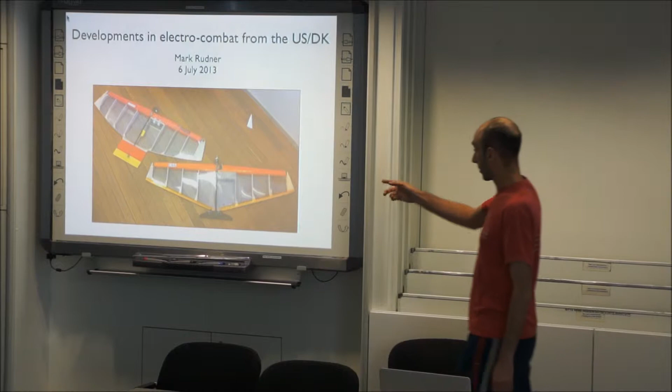So here are just some pictures of two models I've prepared so far. This was the first one. The second one, and it's not so obvious in the picture, is quite a bit bigger actually.

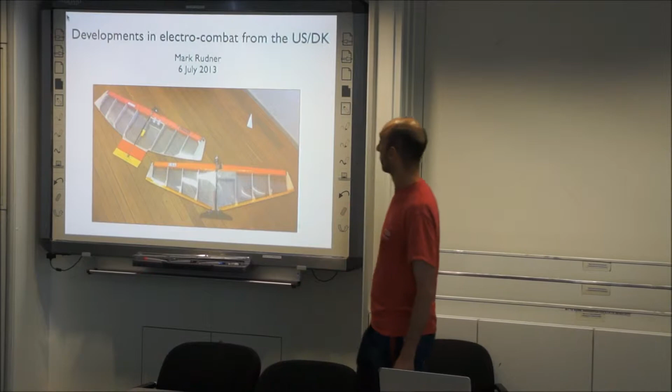I thought that more wing area would help hold the weight better, but it turned out the plane was just not a good plane. So here this weekend I only have this one, but there are some new ideas I used here, and I'll explain them in a bit.

So before I get really started, I think, well, okay, so we're here this weekend to have fun and talk, and also to share information. And I think also a big point of the weekend is to have a discussion about where we think electro-combat is going, what can electro technology do for us.

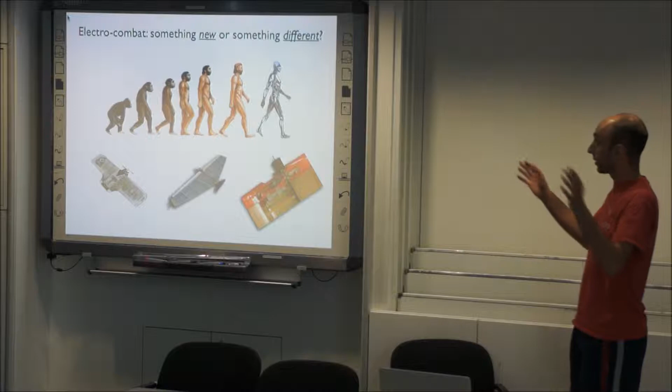And I think there'll be many questions which come up, but one overarching theme is sort of how do we think about electro technology? Is it something new or something different? And what I mean is, if we think of it as something different, we would say there's F2D.

It's been around a long time. We know how it works. And now, okay, there's electro. It has all kinds of different conditions we have to think about. There's batteries, electronics. So we just start a whole separate class and think about it independently from everything going on in F2D. The opposite extreme would be we think of it as something new.

So there's been some evolution in combat. If we go back to the 60s and 70s, there was diesel combat, and then in the 80s, glow took over, and technology really stabilized. Planes haven't changed, engines haven't changed in 20 years.

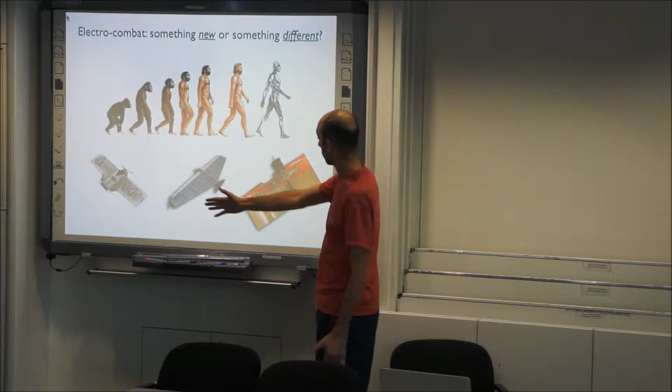Okay, small incremental improvements. And maybe the next step is electro technology. We don't know if it's going to be better, but maybe it is, and it's just part of some natural evolution. And this is something we should think about.

Which kind of picture do we have in mind? Maybe some of both, but I think it's a theme we should keep in mind.

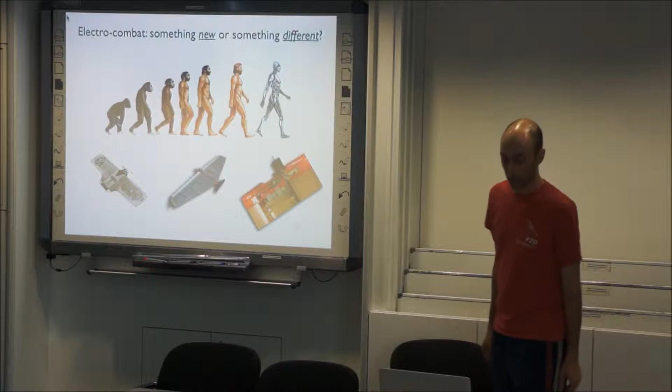So for the presentation, there's kind of two sections. The first one, I'll just summarize sort of what I found, and the second part, I'll show in detail some of the ways I found of adapting electro components into F2D models. Maybe just give some ideas. I hope I can see what you guys have done as well this weekend.

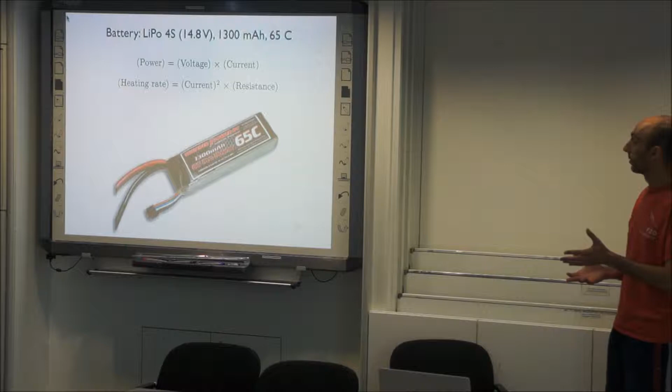So the starting point of all of this, my thinking when I started working on electro was I visited Lothar here in Munich about 1.5 years ago, and actually I was impressed. I thought electro would be a lot worse than what I saw. But the one thing that stuck out to me was that the level of current being used was so high. It was something like almost 80 amps.

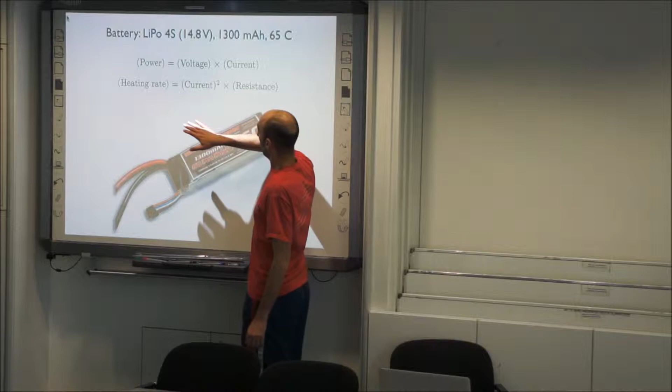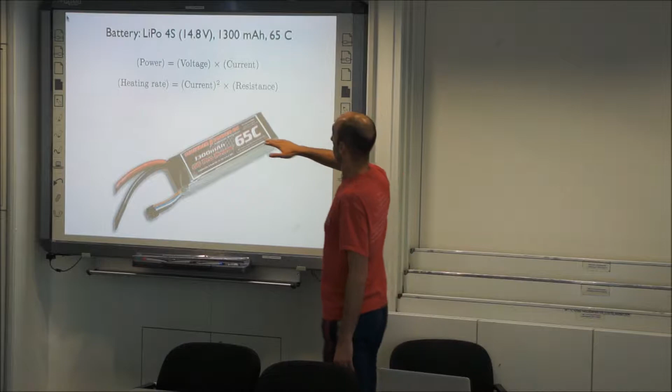And if you just look, okay, this is the only formula in the talk, but the heating rate that you get when you apply some current goes like the current squared. So as the current goes up, the heat goes up really fast. And the power that we're getting out of it is a product of voltage times current. So for a particular power, we can reduce the current by increasing the voltage.

So I said, instead of using a lower voltage battery, why don't we move to higher voltage? So that's why I started with this 4-cell battery, which is 14.8 volts, and that was the whole starting point for my thinking, and then I thought, okay, let's go from there. And so this is the battery that I've been using.

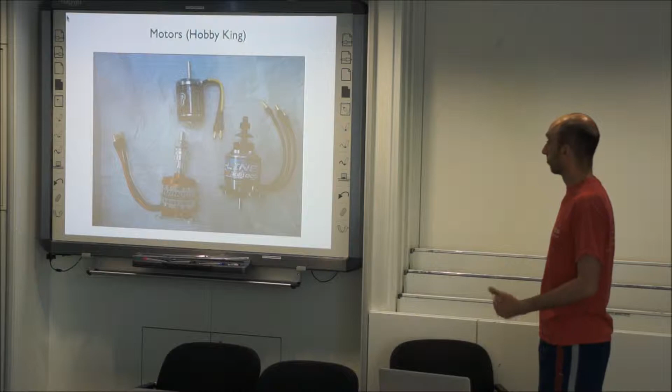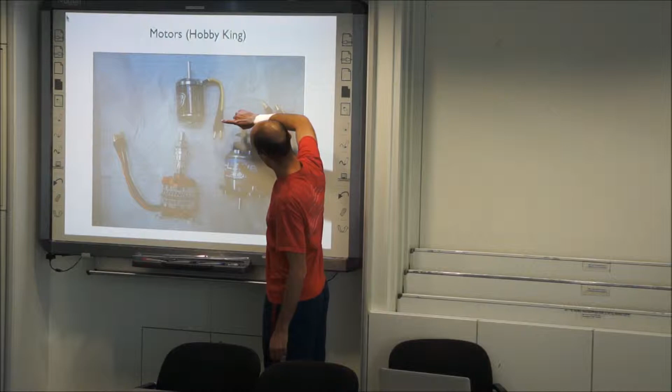For motors, there's plenty of motors you can buy online very cheaply. These were the first three that I bought, in January last year. They're all about $15 and come to your door in a couple of weeks. They have different characteristics, so you can't really tell just by looking. This is the kV rating, which tells you how many RPM per volt you get.

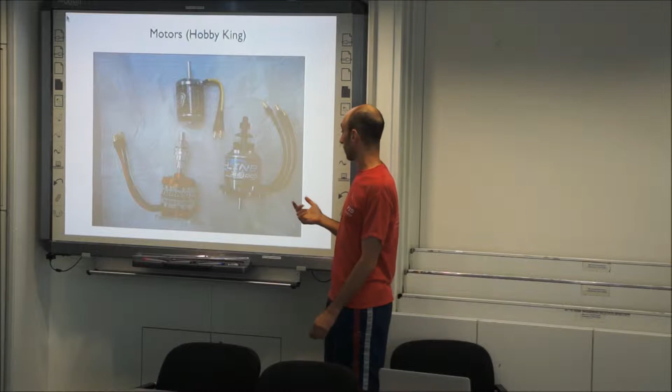This one is a very light motor, only about 80 grams, but it turns 2200 RPM per volt. At 14.8 volts, it's turning very fast. This one is 1000 RPM per volt, so it's much slower—more like 14,000 RPM in the air.

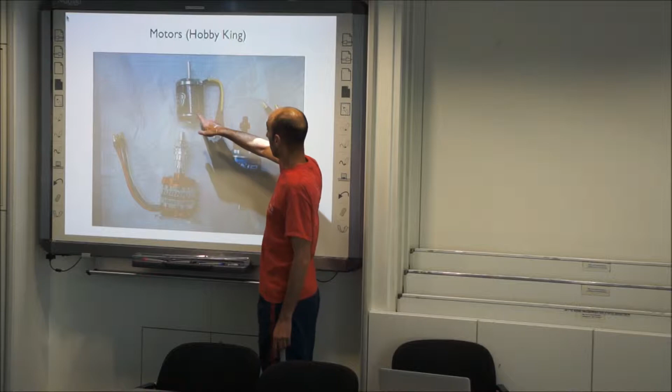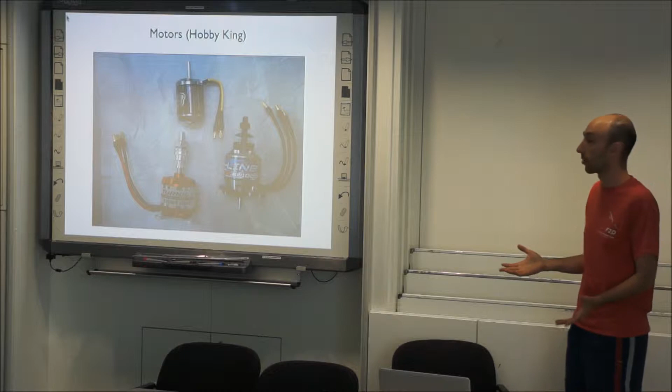And this was some kind of intermediate regime. Since then, I bought a cousin of this one, same weight, but it turns even faster. I tested it a few weeks ago and it turned 35,000 RPM with the T2 prop from Zorro. It was very noisy, but interesting—not from the point of view of reducing noise, but just as a high-performance motor. It could be something interesting to play with, maybe get something better than what a Fora is doing.

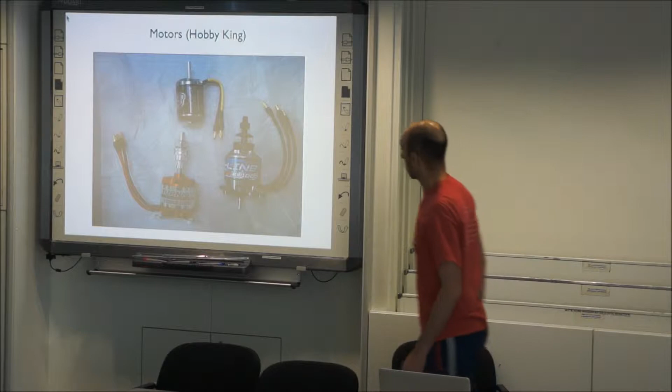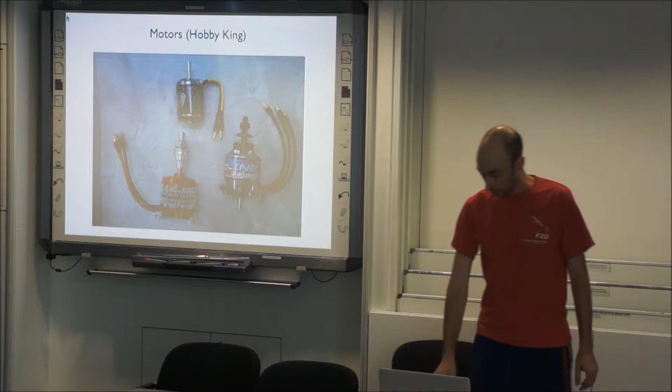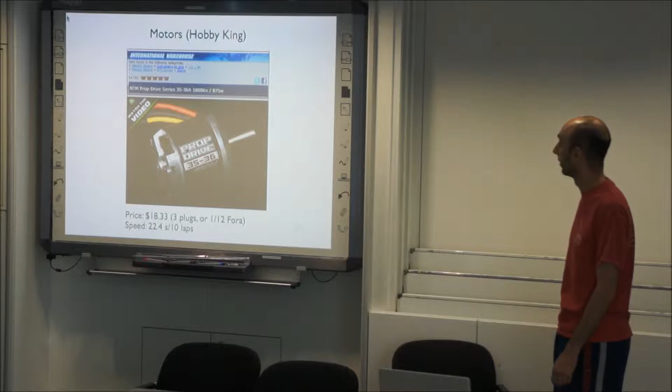So out of this motor and this one, I managed to get 24.7 seconds for 10 laps, but I couldn't do any better than that. Then I decided I need more power, and I found this motor, which is the best I've tested so far. It was $18 from Hobby King, and it got 22.4 seconds for 10 laps, straight out of the box. That was pretty exciting for me. So that's about motors.

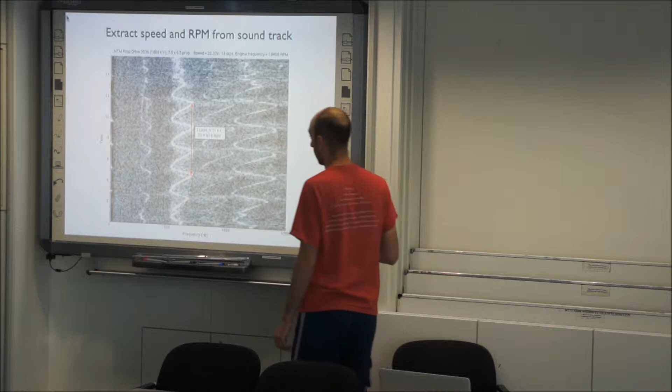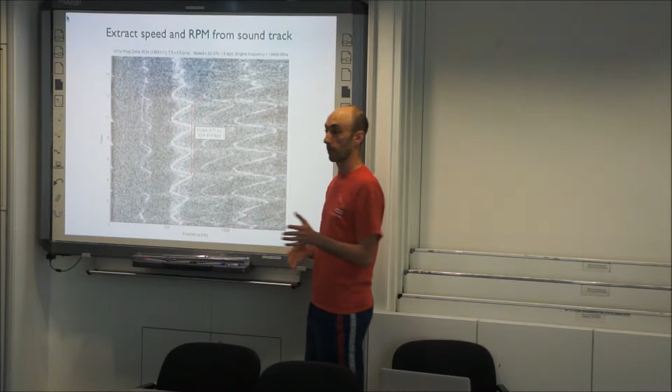As a kind of side note, there's some analysis I've found which is kind of neat. If you record the sound of a flight, just fly some laps, I wrote a little program where you put in this file and it outputs this picture. Time is running this way, and this is frequency, measuring the frequency of the engine sound as a function of time. The frequency goes up and down, just like the Doppler shift you're familiar with hearing.

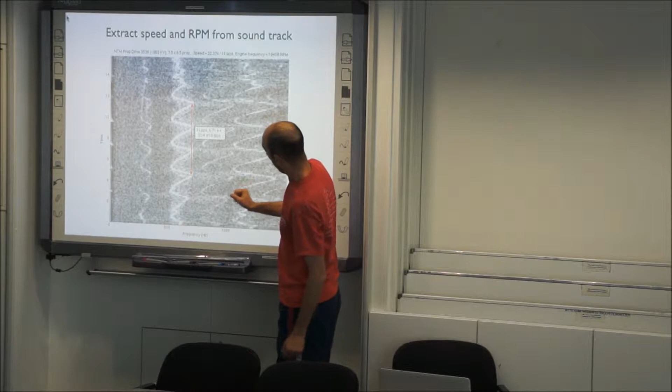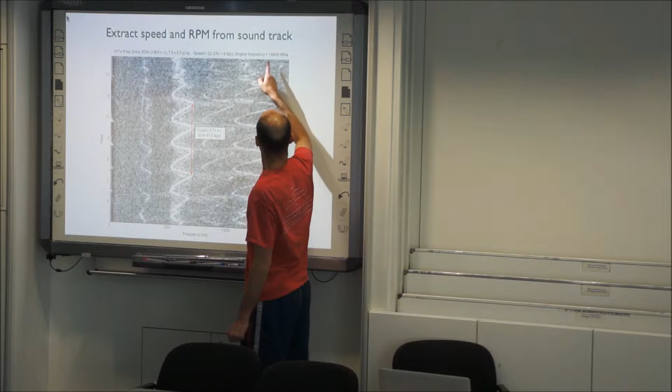Each time the frequency goes up and down, that's one lap. So you can just read right here what the time per lap is. And from the frequency itself, you can get the RPM it's turning in the air. So this one says 22.37, let's say 22.4 for 10 laps at 18,500 RPM. It's kind of convenient—just record your flight, and afterwards you find out all this information.

For props, I took a bit of a different route than maybe what other people have been doing. I've been using wood propellers, for a few reasons. One, wood is very light, and we have a weight problem with this stuff. I compared an APC electric prop to one of my props, and there's a 10-gram difference. That's actually a pretty big deal.

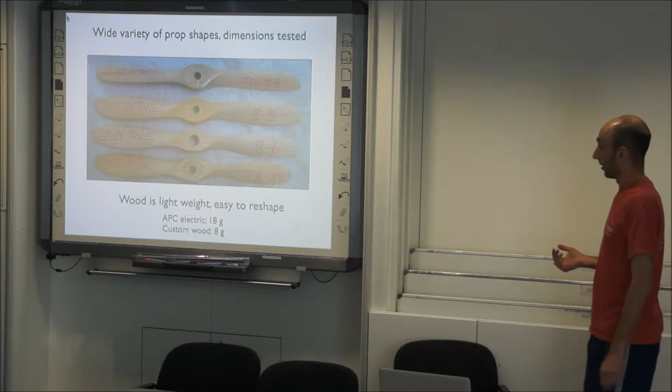The second reason is that when we used to fly fast combat 20 years ago, I had a lot of experience making these props, and these were actually left over from that time. It turned out that this one, which was used in competition in fast combat, is the best propeller I've tested so far on all the electric motors I've tried. I've made something slightly better than it since then, but somehow they work pretty well.

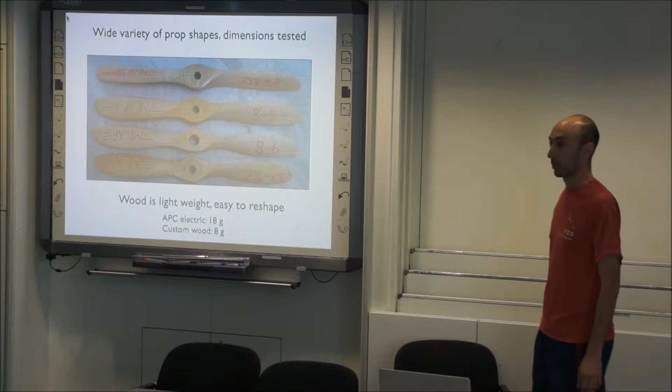I think eventually we need some kind of solution here. It's very time-consuming to make these propellers, but I think once we find the right shape, someone can produce them.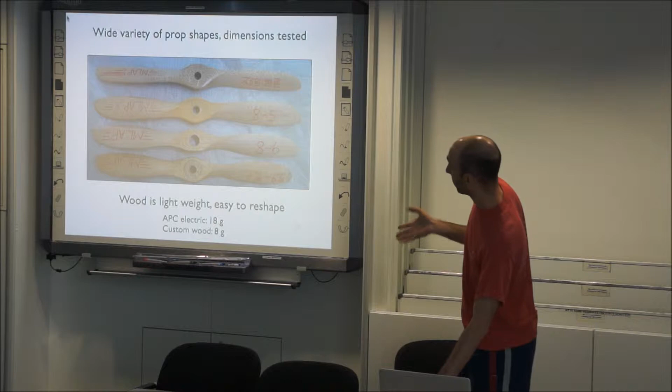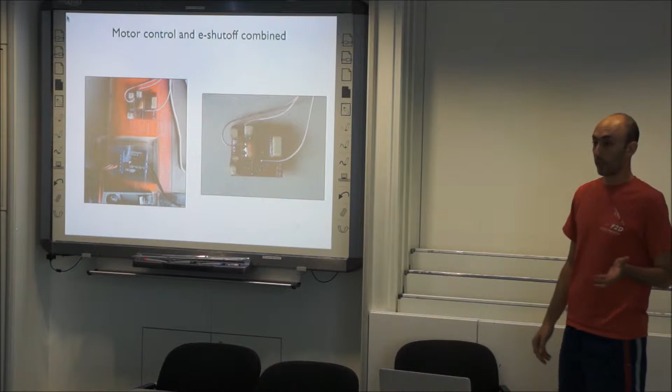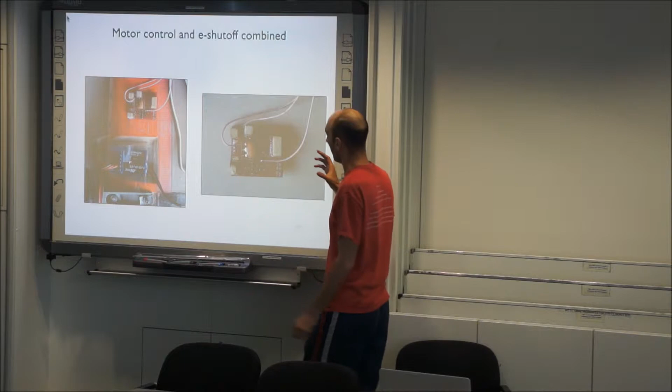This is something that Lothar mentioned. Right now, I'm using a 2.4 gigahertz transmitter-receiver combo to control the motor. But Alex Prokofiev and I have been working—mostly he's been working—on adapting the engine shutoff from F2D to run the electric motor. It functions right now; there are just some software bugs we're working out.

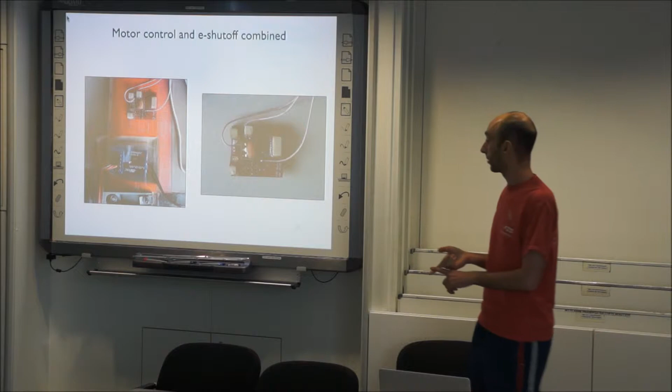So you get the shutoff and the control of the motor all in one, just from the switch on the handle, as we use in F2D. And this is all it is—this tiny board. It's actually even much lighter than the receiver itself.

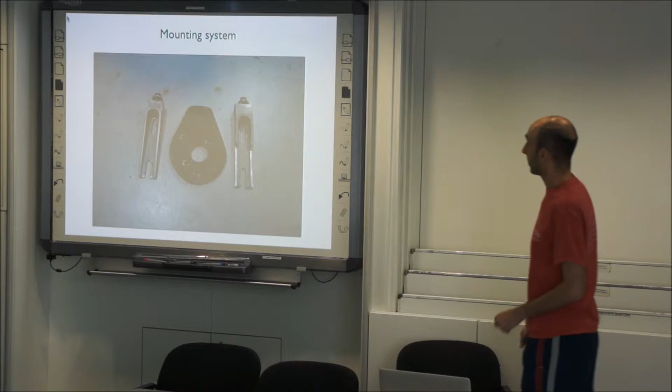Right, so how have I been going about this? First, how to mount this electric motor. My idea was just take a set of F2D mounts and cut them off the front, and then make some plate that can adapt the electric motor to the F2D mount.

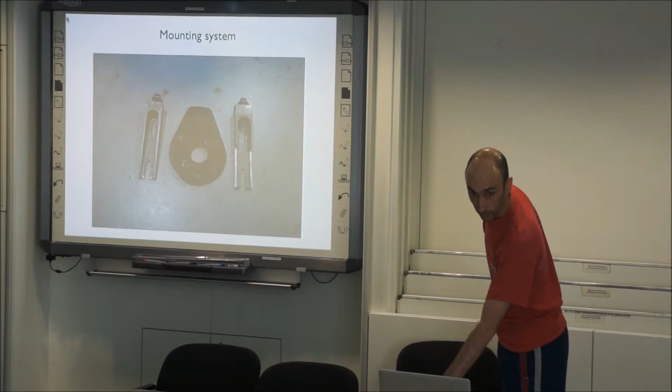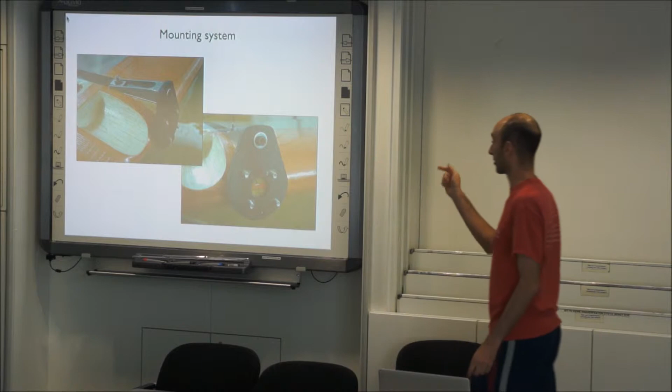So here's what it looks like on the plane. Just slides right on like normal, and these four screws attach to the motor. So actually you can see you have to put the motor on before you slide it on the plane, otherwise you can't. And it's a little bit of a pain in the ass because there's only one order you can do all these screws in, otherwise it doesn't work.

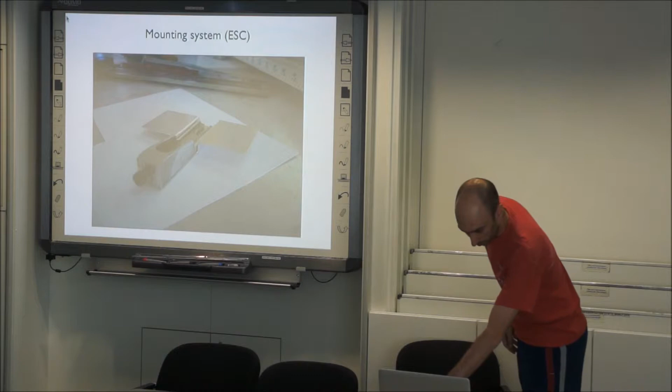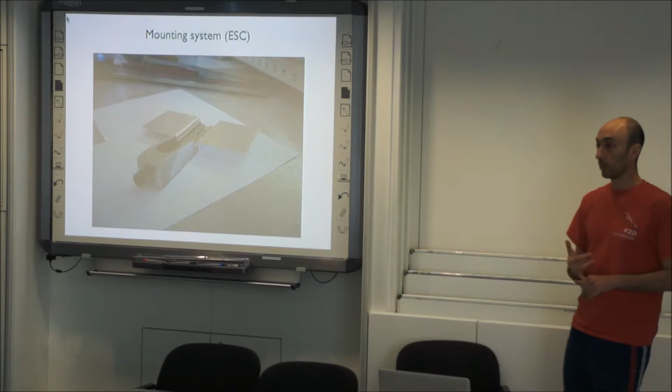And then for the speed controller, heat is a bit of an issue. So we have one advantage, which is that compared to radio-controlled models, our speed controller is on the outside of the plane. So there's a lot of air flowing past it, which is good. But I wanted to do even better a little bit, and I thought we have this big chunk of metal, which is the mount, sitting there. It's kind of a natural heat sink. So why not try to guide the heat from the speed controller right into the mount?

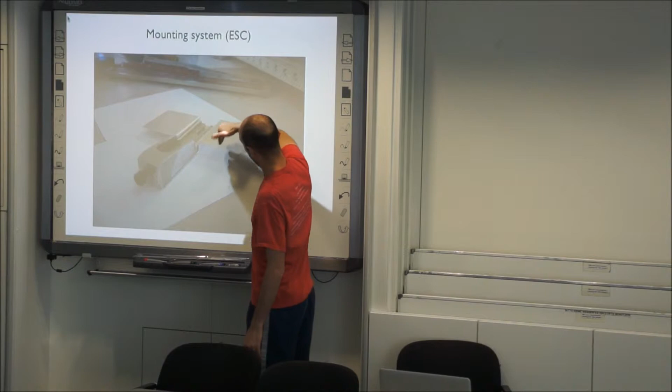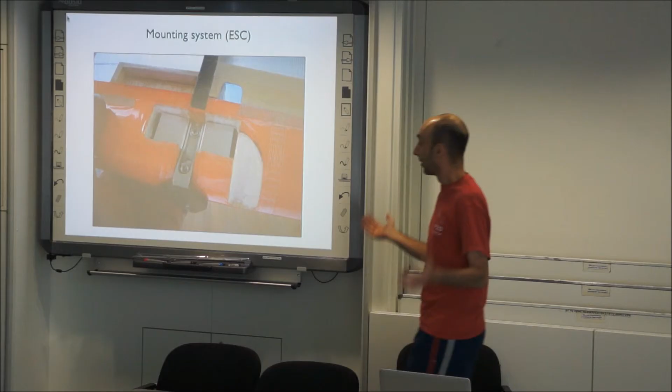So I made this aluminum flap, which goes under the mount, and the speed controller will sit on top of it. So it goes down in the plane like this, and the speed controller sits on it, and how well it works I don't really know. The idea is that it should transfer the heat into the mount to help keep everything cool. And you've seen this picture already. That's just with everything in place.

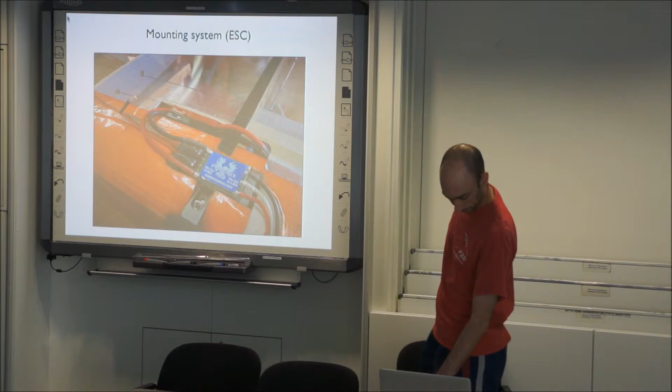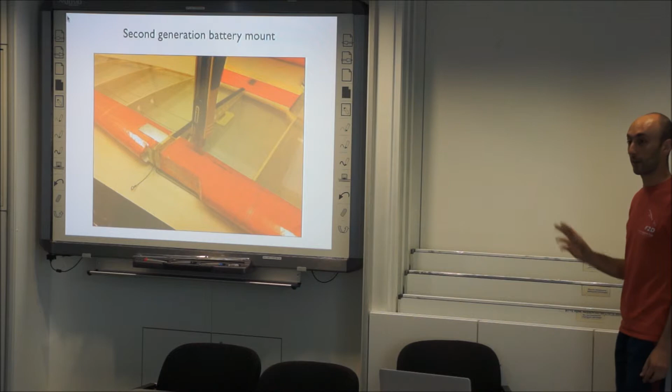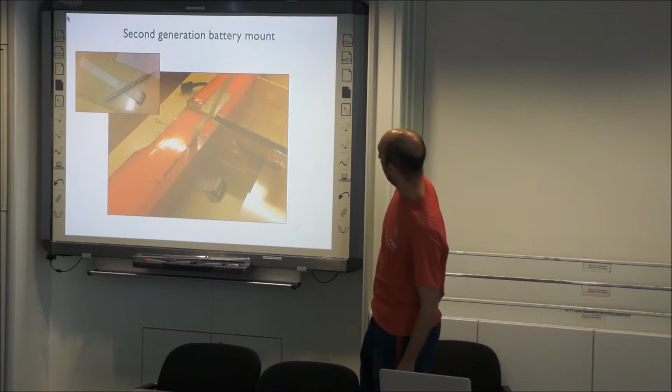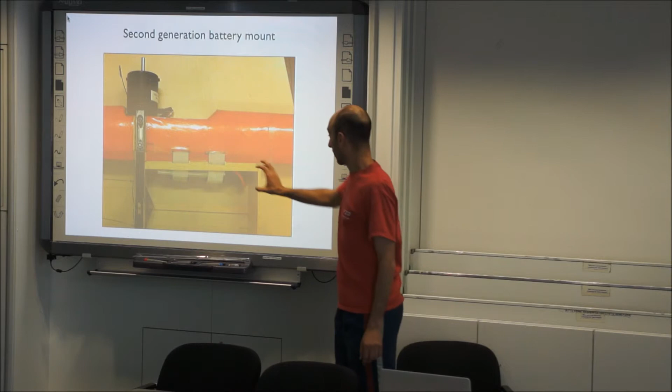Right, and so then after playing with this for a long time, I decided to make a second plane, and I had some better ideas on how to do it, in particular about mounting the battery. So this will just be a quick couple pictures of what I think is now a cool way to do the battery. So to start, just with the knife, we made two slots right ahead of the spar. And then, cutting away the covering, just slipped a Velcro strap right through the slot, one through each slot, and then it just holds the battery like that. It's really, really clean. It takes only about 15 minutes.

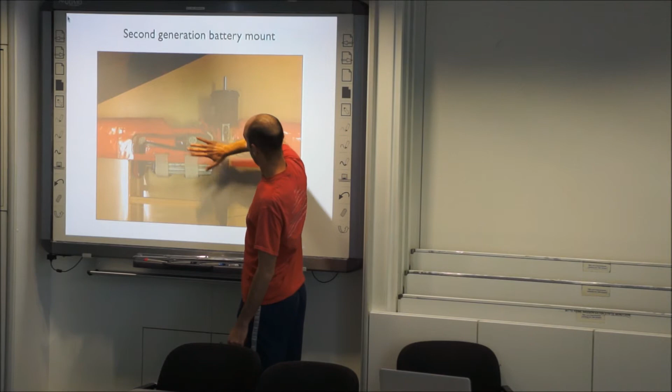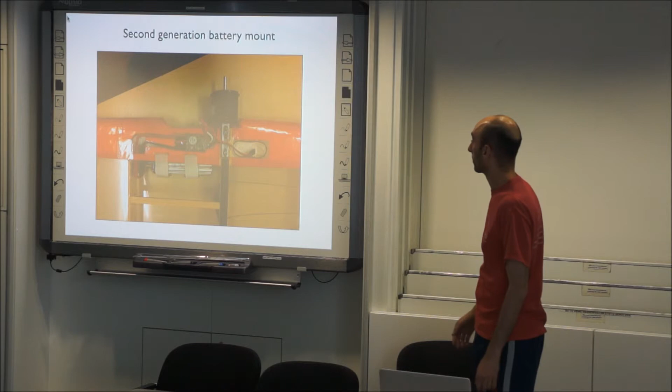Here you can see it is carved into the foam. The speed controller sits down in there, and the wires go right under the spar, so everything's totally out of the airstream. It's really clean. Unfortunately, the plane was crappy, but I think this method is good. I'm going to do it on the next plane.

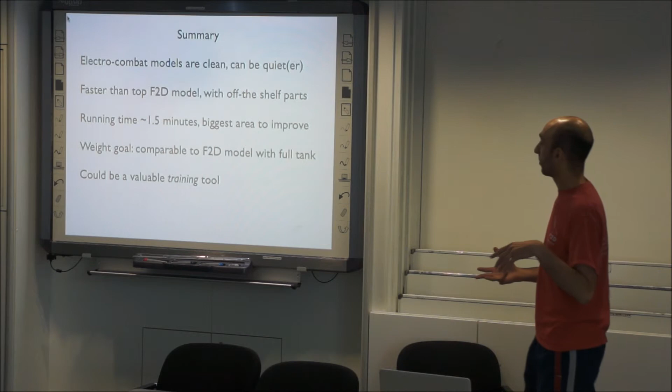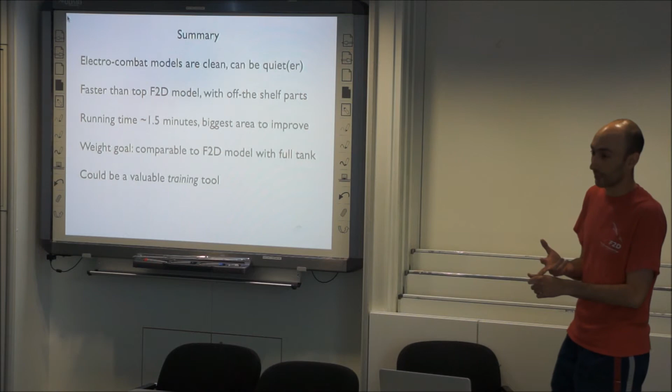So that's basically my summary. So what I think so far from my experience: electro-combat models, they're clean. That's kind of nice. No cleanup to do. They can be quieter. As I mentioned, when I tested at 35,000, it was every bit as loud as a Fora. Actually, I have the recording. You can listen to it in a minute if you want. Speeds can be faster than F2D models with off-the-shelf parts, which is nice. I mean, like I said, an $18 motor can give you 22.4 seconds.

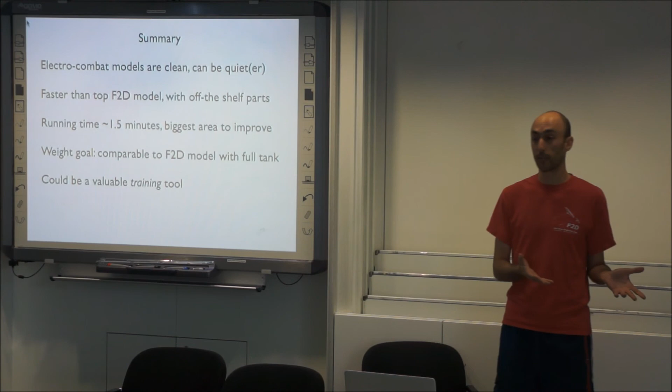The running time is probably the biggest area we need to improve. We can get maybe a minute and a half if we're lucky right now. Weight also, it's not so bad, but we need to bring it down a bit more. And one last thing, aside from competition, I think that these electro models could be simply a valuable resource for training. They give us a lot more opportunities to practice in places like this, and for teaching new people how to fly, getting people interested.